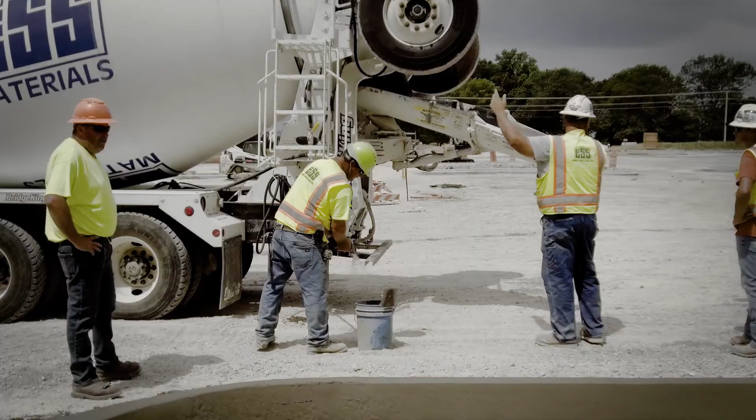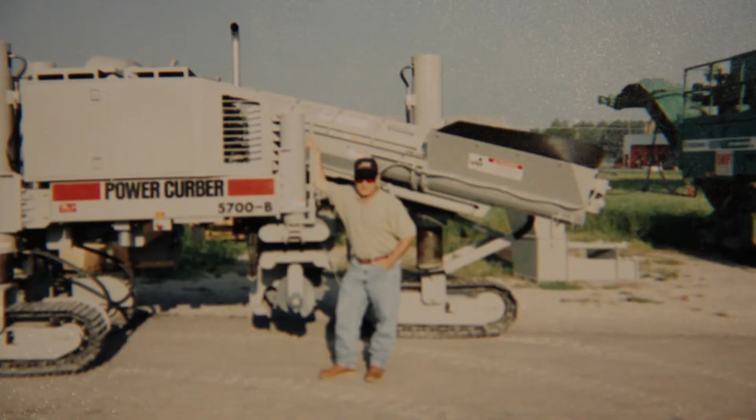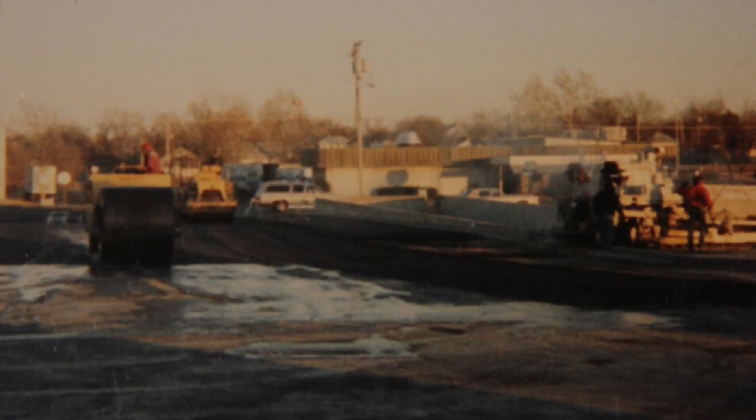We were founded in 1972. Billy Sapp founded the company, named it after his father, Emery. He grew the business, operated it from the 70s into the 80s and into the 90s with an important merger with 4M Bridge when Glenn Robertson partnered with Billy Sapp and then grew the company from there.

Well, I tell you, I'm one of the original guys. There's several more that have been here a little bit longer than me. We did have an original culture here that we all grew up around, and it was a lot of personal sacrifice in those days to build this company.

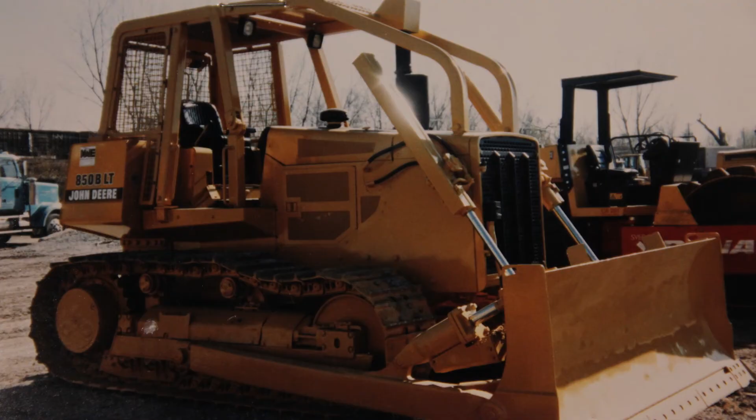The merger with Billy Sapp and Glenn Robertson with 4M Bridge and Emery Sapp & Sons, that's really where the company took off. It went from just doing grading and paving to being a full turnkey service when we added the bridge side of the company. So now we can do just about everything.

So in 1999, he sold the company to the employees. We became the Employee Stock Ownership Plan, or ESOP, and he made an important decision then that those who worked hard to provide for him, he decided to sell it to them.

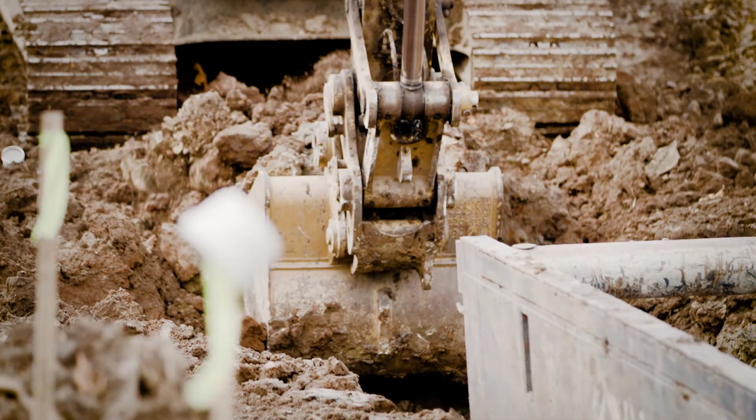Billy saw the value of comprehensive services and compression of schedule to the benefit of these developers, and that's how he founded this company, and that DNA is still a part of our operations team today.

They're still like that today, a lot of them are, and that's why we are like we are, because of those guys. And that mindset that we got from Billy Sapp, which was pretty much get in here and go after it and we'll win. And it's happened, there's no doubt about it.

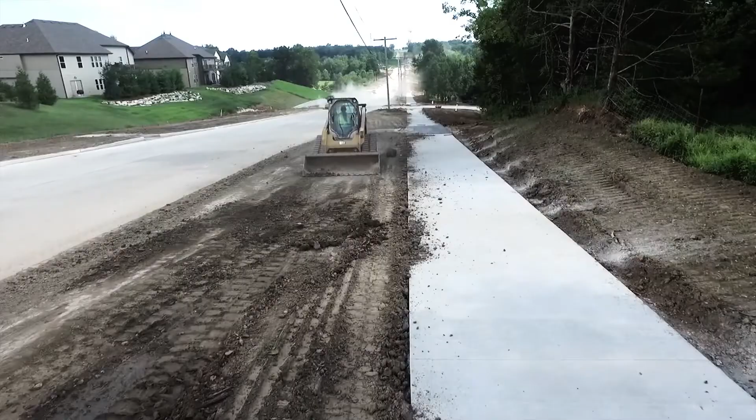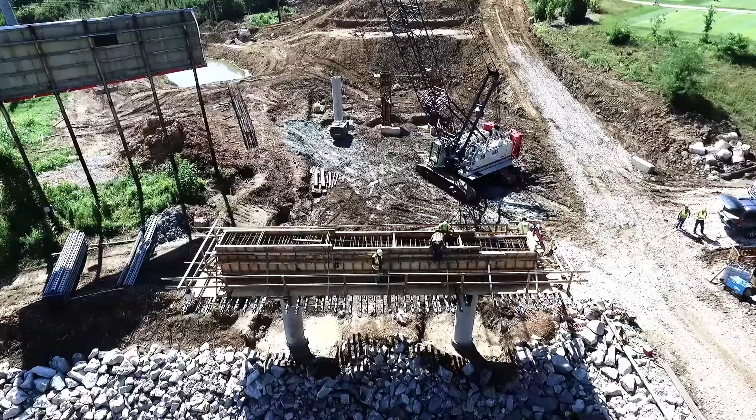When Emery Sapp says that we're turnkey on a project, our goal is to self-perform as much of the work as possible. All of the milling operations, all of the asphalt operations, base rock, grading, utilities, concrete paving, asphalt paving, bridge. We look to own the entire project and not simply managing the construction that others would perform.

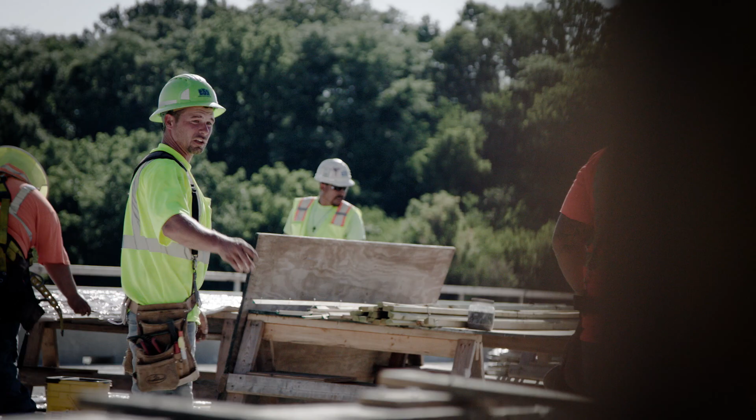What differentiates ESS from other players in the industry is we have a lot of availability to approach projects different ways, whether it's fast track or design build. We have DOT experience, private development.

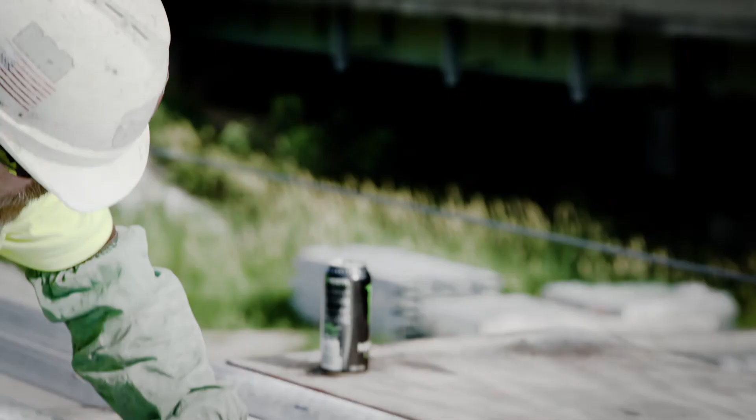One of the biggest benefits to ESS is the diversity in the type of work and the locations that we work in. We have $10,000, $20,000 projects to $100 million projects. We can be a total turnkey civil contractor, overlap trades, overlap scopes within that civil world with the ability to self-perform roughly 85% of our work.

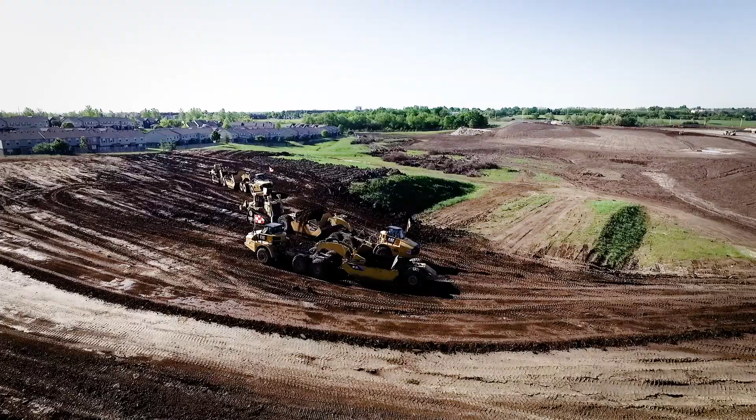We have a great ability to control our schedule and our destiny as far as the resources we can allocate to that project. In terms of the earthwork volumes, we've moved over 1 million yards of material in 59 days for a replacement hospital.

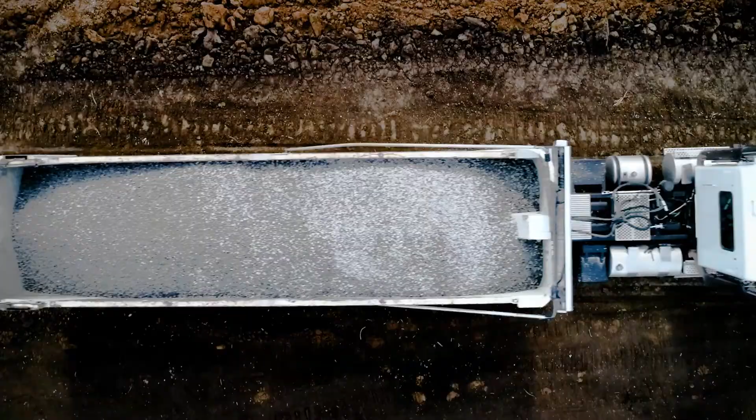800,000 yards of material at a big distribution center in basically 8 weeks. We've had days where we've approached 30,000 cubic yards of material moved in one shift. So we've got a lot of horsepower and we can move a lot of material. We've set some pretty staggering numbers.

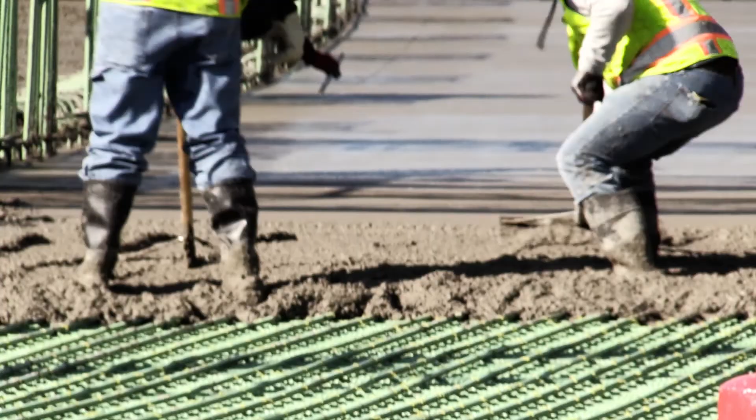We're being productive, we're getting work done, everybody goes home safe. That's the challenge every day that brings me to work the next.

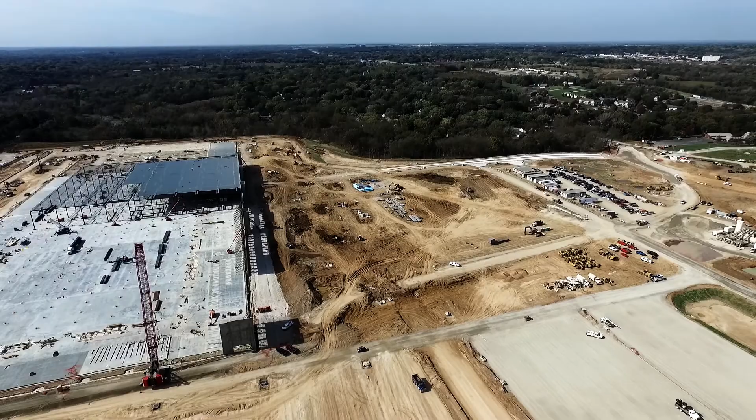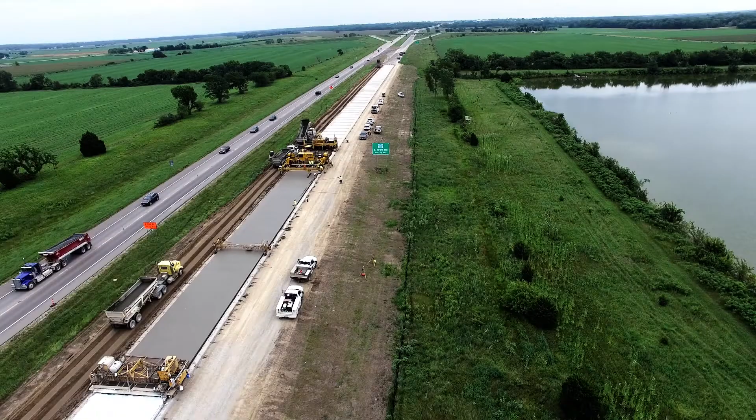Before I came to ESS, I knew they were a large construction company in Missouri, but over the past 6 years, I've seen them grow to one of the top contractors, not only in Missouri, but also the Midwest, taking on aggressive projects, the K-10 Lawrence Trafficway, the bridge slide, building an airport runway in 9 days, those unique projects that really set ESS apart.

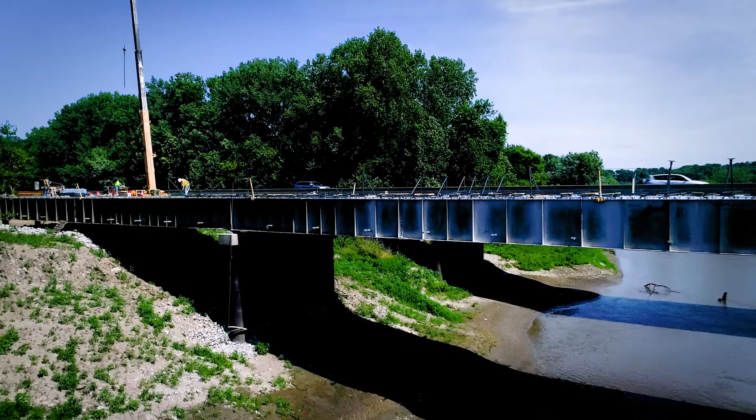Emery Sapp is a very diverse company, and some of the lines of industry that we work in, the client base is everything from private developers, somebody that buys a piece of ground and wants to build a subdivision, all the way up to Fortune 500 companies.

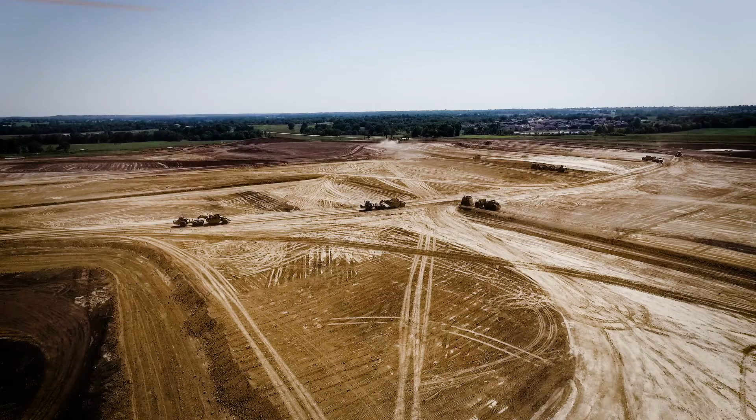We work for the Corps of Engineers, we work for Federal Highway Administration, state DOT agencies, airports, FAA, Department of Homeland Security. We work most of the time as a general contractor or prime contractor, but we also work oftentimes as a subcontractor to larger general contractors.

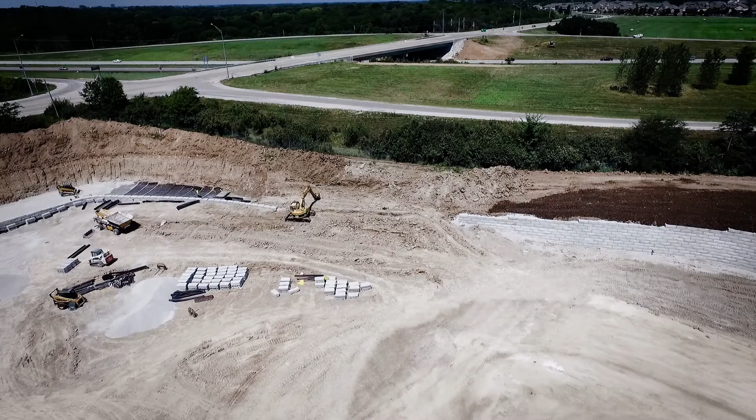I think Emery Sapp is unique in that we serve a wide variety of clients. Not just your public entities, your city governments, your state governments, but we serve private developers, big box stores looking to expand, warehouses, airports. Our competitive advantage is really simple.

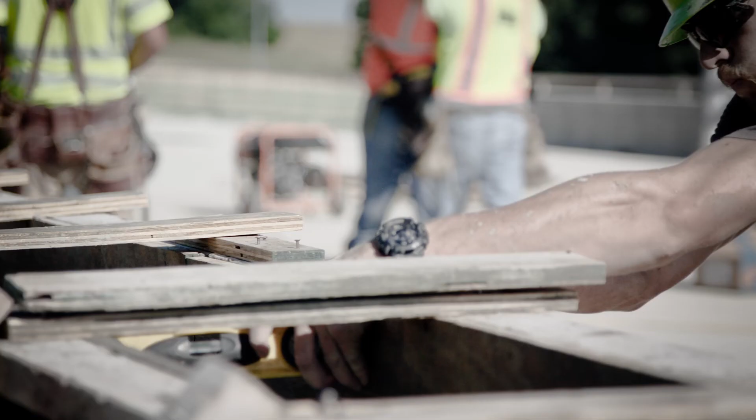It's not a new philosophy, it's teamwork. It's simply teamwork and dedication to satisfaction of our clients. That sounds really simple, but as I've discussed openly with others, we don't have a fear of can someone outperform us on this project? We know that the teamwork through every branch, through every crew, we can call on anyone

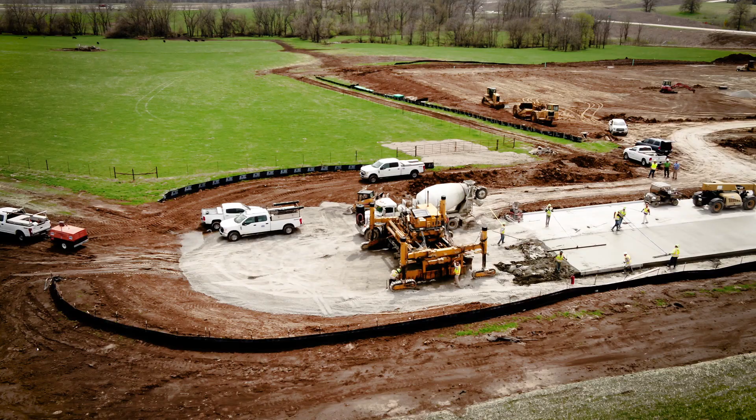and outperform our competition. I believe the reason why clients come back to us time and time again is we demonstrate that we have the ability to perform. And I think more importantly than that, they learn very quickly through an experience with Emery Sapp that we do what we say we're going to do.

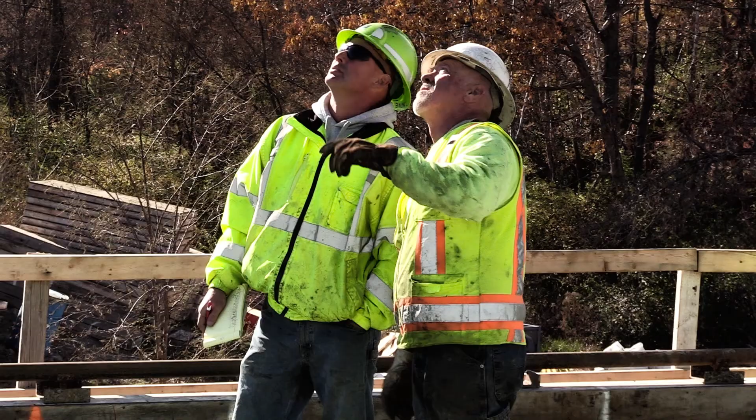Relationships are definitely a big key to everything we do. From a DOT project in a new environment, spurring development, building relationships with everybody in the neighborhood, it just keeps things going. Our customers know a lot of our employees' names, both in work and outside of work. They feel that we've invested in them and they're investing back in us. That's why they keep coming back.

Technology not only helps us here at Emery Sapp manage, but it also helps our clients. We can give them constant feedback for how things are going on their project at any moment in time. If we can predict a problem that's coming up, we'll tell them, let them know, let them digest it, and we'll also present a solution with that problem.

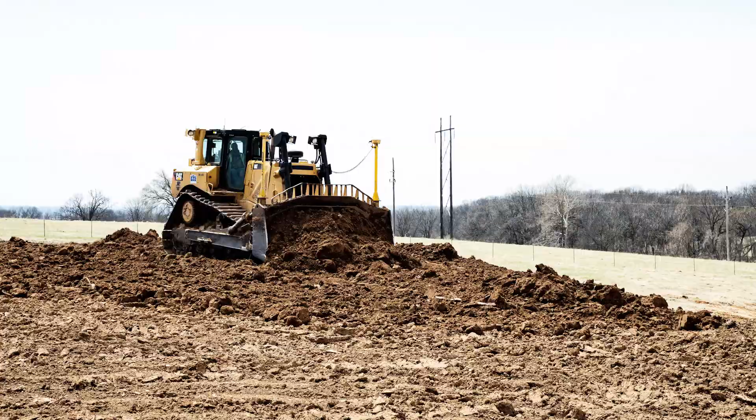Communication's everything when you're managing resources throughout a region. We want to know on any minute how we're doing on any project. We utilize a lot of project management software, estimating software, drone technology, all to get that feedback on our phones, on our iPads, at a moment's notice.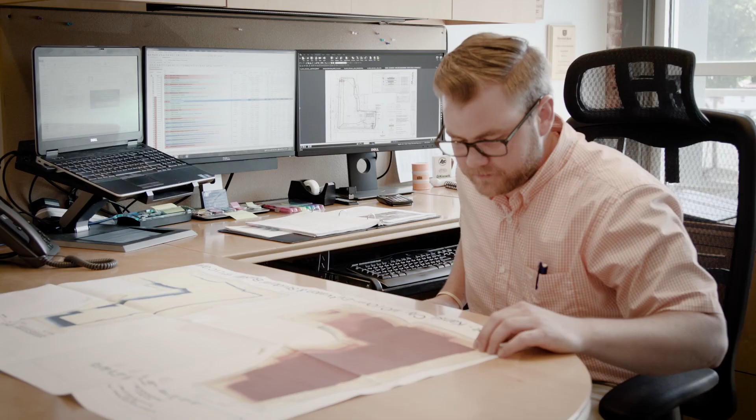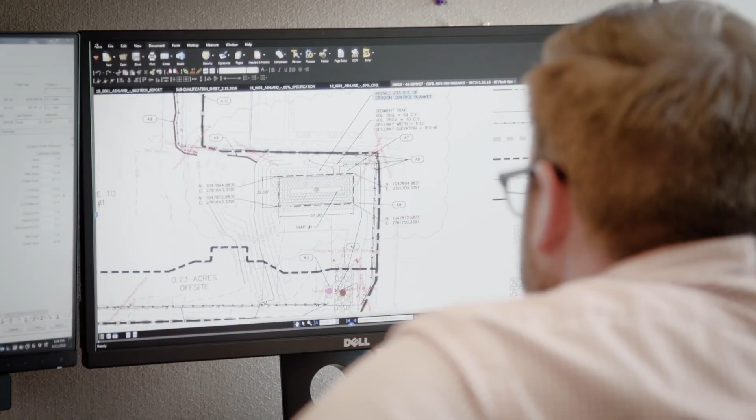That way we can make changes at any given time during the course of work. We use AGTEK earthwork software that calculates volumes of dirt, what types of subsurface materials, if there's limestone on the site, balance points, means and methods, how we construct the project. We also use PlanSwift and a two-dimensional takeoff, along with Bluebeam. Both are great instruments of digital takeoff software. These softwares ensure that we don't miss something. The owners get a sense of assurity that what we're taking off is the correct quantities.

Surveying really begins in an office. So we take the engineer's plans and we use the combination of both of them with the help of Trimble Business Center and AutoCAD to create a 3D model. In the survey department, we take those plans and digital models, we mesh them together, we make 3D models. From there, you take that, you put it in a dozer, you put it in a rover where somebody can be on foot.

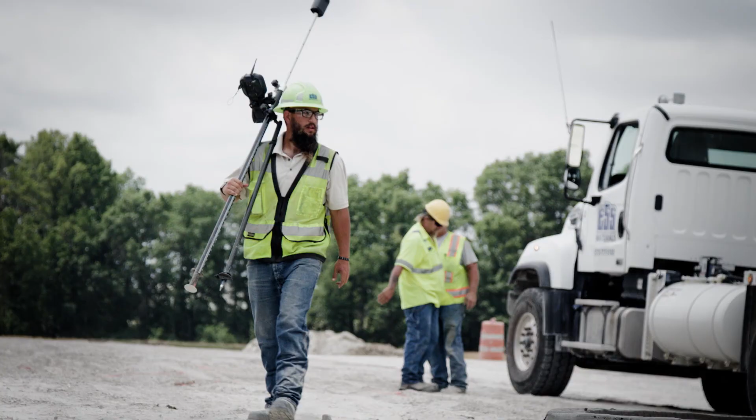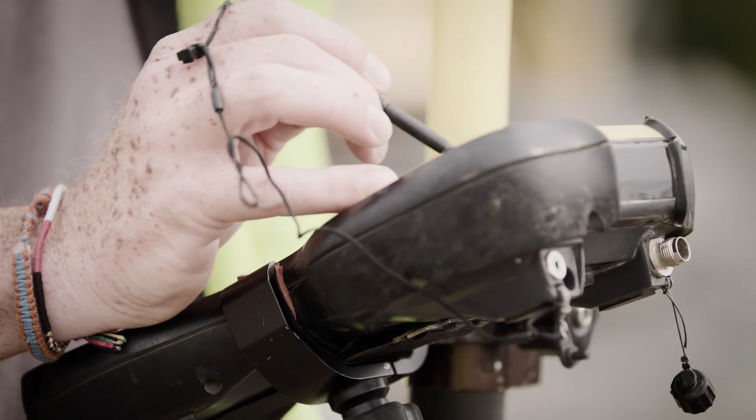We shoot those in off control points that we set so that they're localized to the job. And then we shoot the machine, create a geometric profile off that machine. The total stations lock onto the prisms on the machine, and then tell it where it is in relation to the 3D model that we created. All of it just talks to each other.

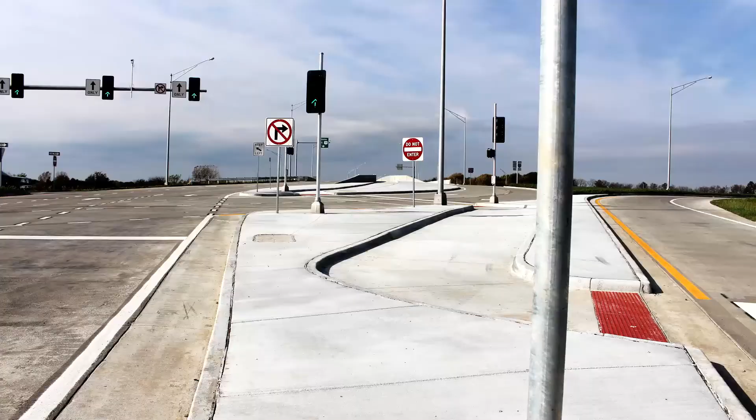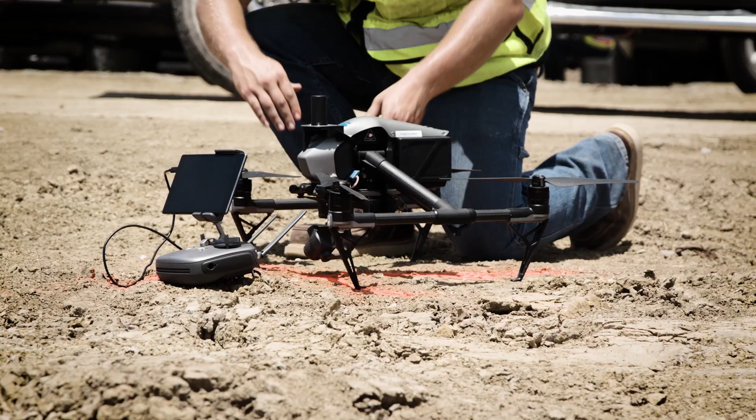We are ensuring that what your designer has put on paper, you're gonna get out in the field. We've definitely pride ourselves in investing in innovation, anywhere from our survey equipment with the drones to our estimating software to our project management software to our scheduling software. We'll do our due diligence, vet that process thoroughly, and then make a decision. We know that as long as we've done the work up front and the data prep, that we can go wherever they say they want to pave and be ready to pave.

We're on the cutting edge of technology. We've always pushed the envelope. We're always one of the first in the region to adopt new technology. It allows us to perform at a higher level at a faster pace. It's just a win-win all the way around.

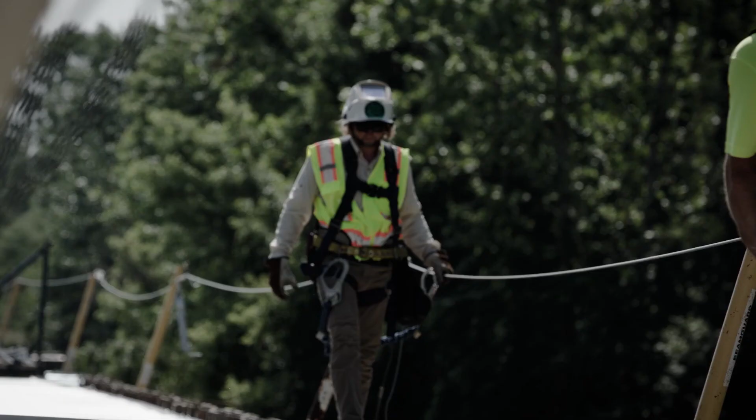Safety culture at Emery Sapp & Sons has always been at the forefront of the entire culture of the company. Safety's everything. Safety's number one. It's 100% important. We won't put you in a situation where you're going to get in any trouble safety-wise. The most important part is that every employee goes home safely at the end of every day.

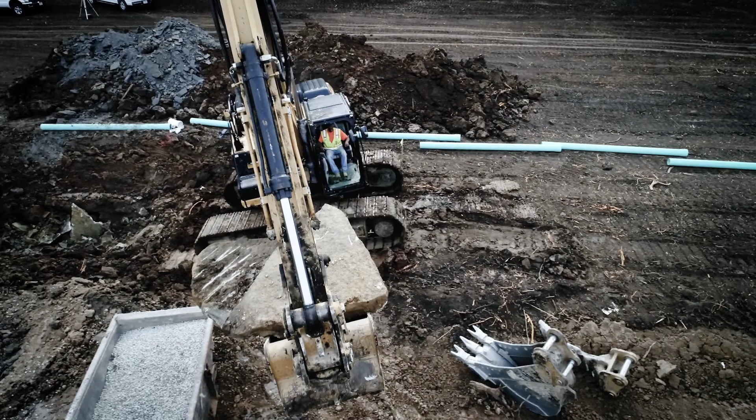Our investment in safety is number one. It's the first thing we ever talk about. Safety, quality, production, in that order. Safety's paramount. They provide every piece of equipment you could possibly imagine for safety. Safest place I've ever been around.

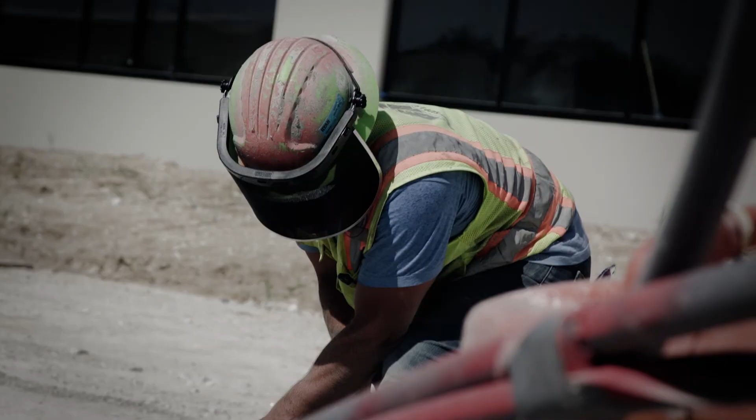Everyone is a safety officer. Everyone has a say in stopping the work if an unsafe act is seen and reassessing that. No one's going to be put in a situation where they have to do an unsafe act, and everyone has buy-in and the responsibility as an owner to ensure that safety culture. We're doing everything we can to keep our guys safe. That's our number one goal.

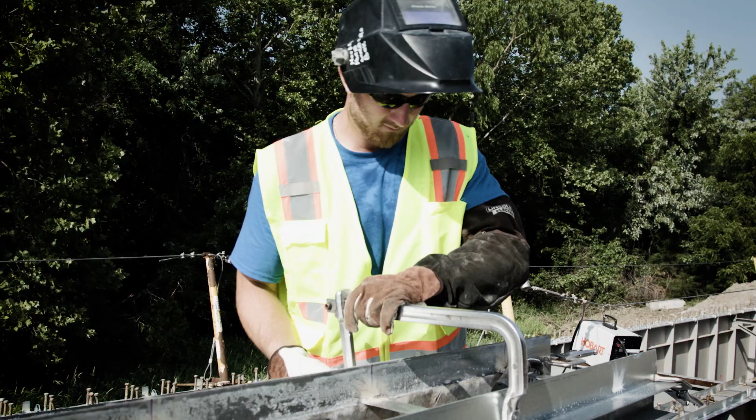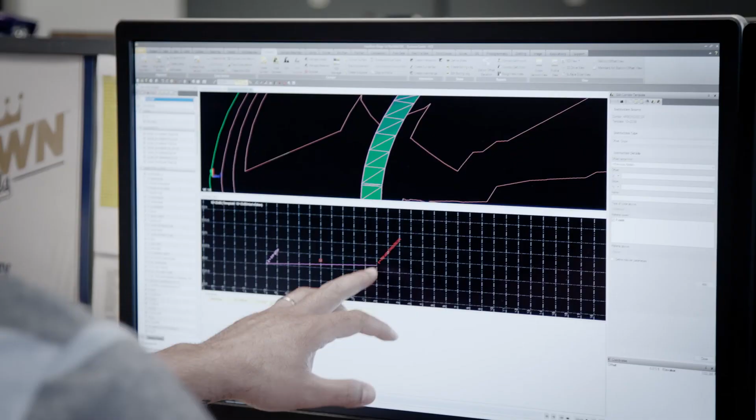Emery Sapp & Sons' quality philosophy is do things the right way the first time. And that goes everything from the way we estimate projects, to the way we manage projects, to the way we build projects. I feel like the bar's set really high. We always want to leave the best finished product that we could on site. Make sure everything's quality so we never have to go back and touch it again.

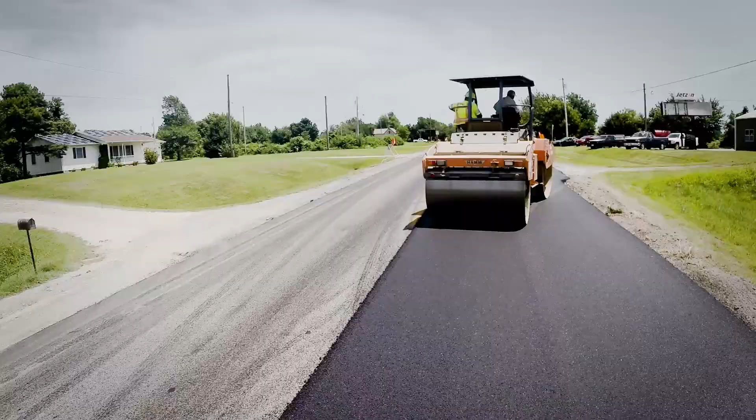Using things like the tarantula curve, which is a new optimization technique, we test every ton that goes out the door. We want our mix to run right down the middle where it's supposed to be. We've won countless regional awards, and you don't win those awards if you are not a quality contractor.

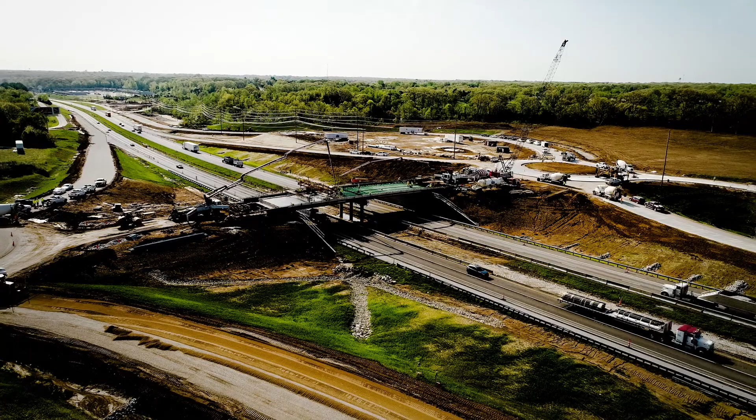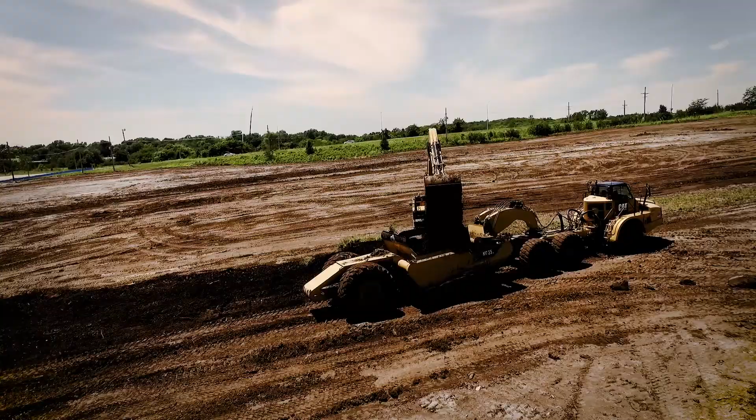From the very beginning, Emery Sapp & Sons has prided itself on being very cutting edge with equipment. We had the first hydraulic excavator in the area, all the way up to the first stringless paving, the first stakeless grading. We've got a very large fleet of equipment, over 1,500 pieces total.

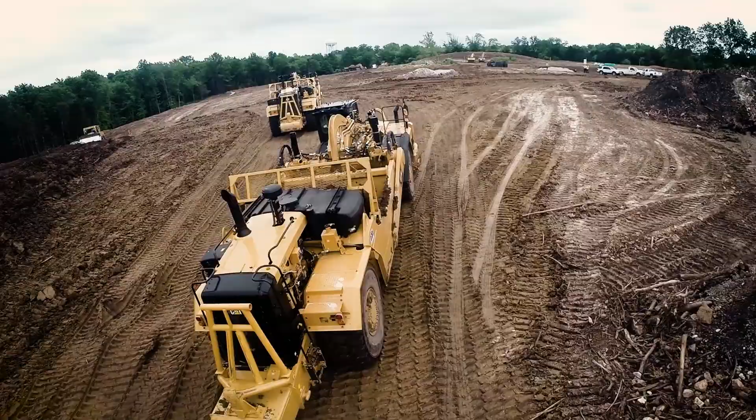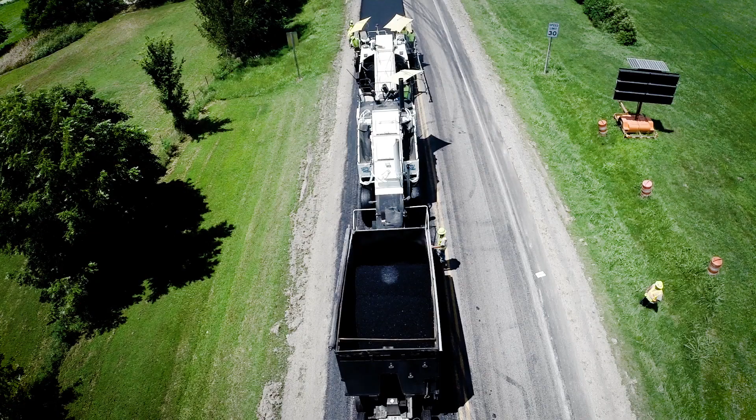Owning our fleet allows us to be more productive. It allows us to boost our production goals. If we can keep our equipment costs down by keeping utilization up, it allows us to pass that cost savings on to the customer. We have 220-ton silos, CMI drum mix, hot mix plant. We also have a full QC setup with 3 guys in that department.

We're really proud of our equipment, but the most important assets that we have in our division are our people and their vested interest in the company. The identity of the company isn't the equipment, isn't the logo, it's the people that make it work, and without them, there would not be an Emery Sapp.

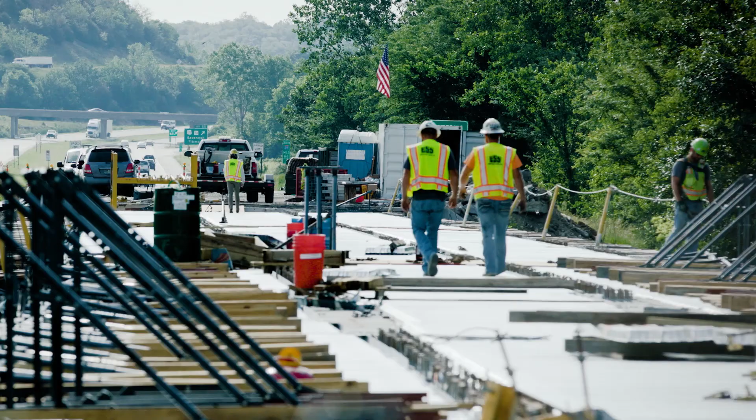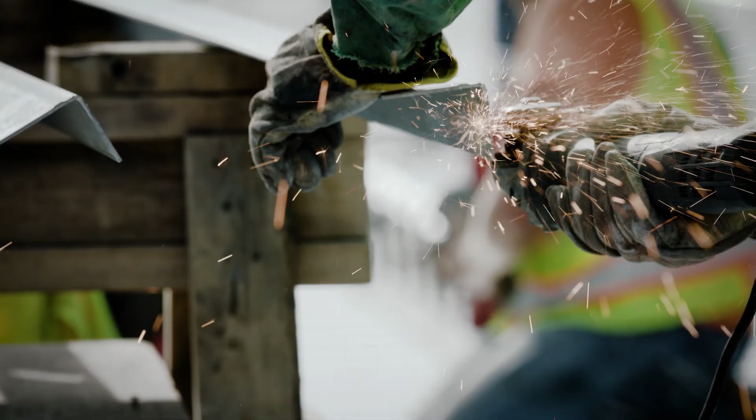The ESOP mentality, which sets ESS apart, is key to every worker because they truly are an owner. The profits of the company aren't going to stockholders far away. They aren't going to the owner of the company. Everyone is the owner of the company.

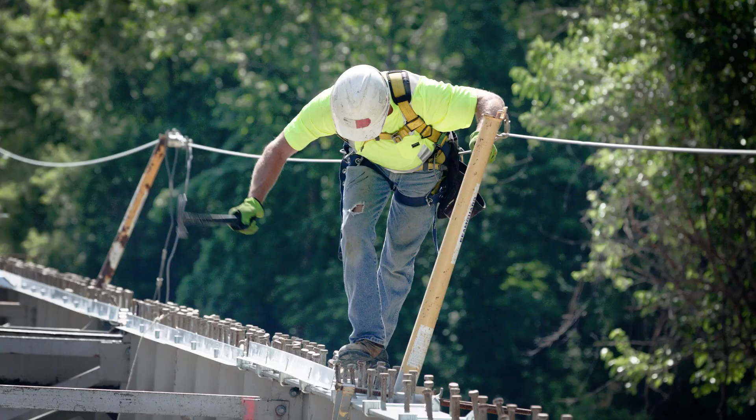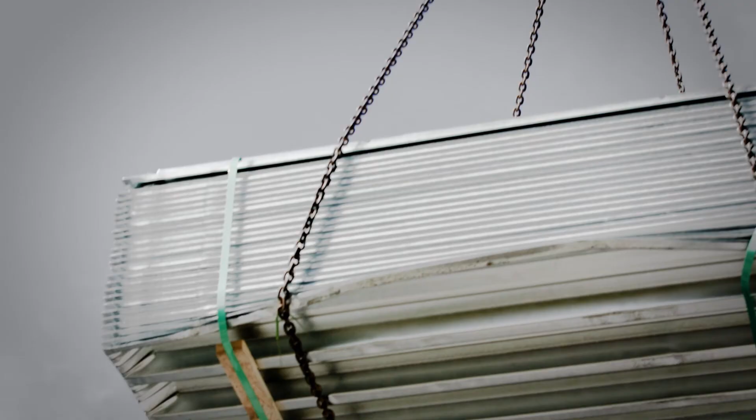Just being a part of ESOP is a really cool experience, just for the simple fact that you're not only just an employee owner, but it's a little bit of accountability that you have with your fellow co-workers, because you're all aiming for one common goal, and that's to make this company successful.

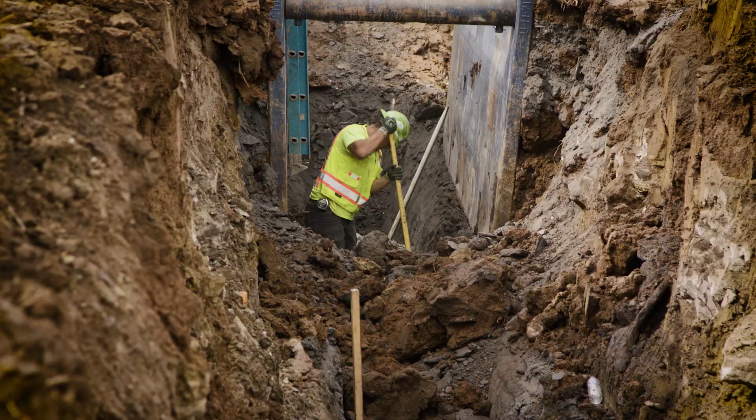They build you up like they build up everybody in the company, and that's what's valuable. Makes you work harder, I think. It's just like a big family out here. They make you feel like you're not a number here, you're part of an ESS family.

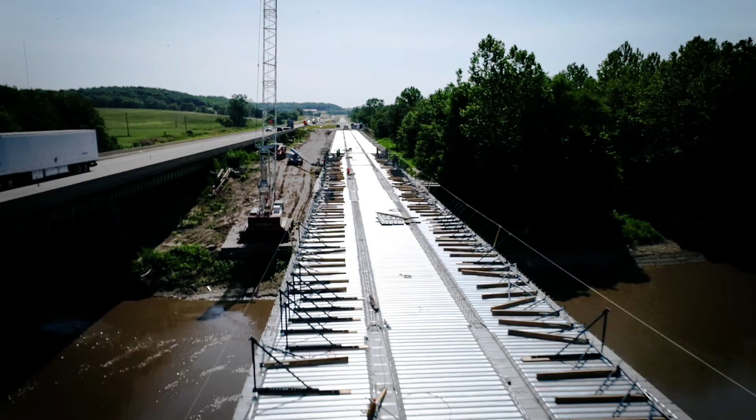One of the number one reasons that we stay profitable every year is our employees. We've invested in them, we invest in technology, we invest in all the right things. We truly keep our fixed cost as low as absolutely possible, and the only reason we can do that is our employees. One thing I love about this company is watching people grow, and as people grow, this company grows. And as this company grows, the wealth of it grows.

The loyalty, the dedication, the entrepreneurial spirit, I think that every one of our employees has, because they know at the end of the day, not only does it benefit Emery Sapp as a company, but it benefits them as an individual. It's unlike anything I've ever been involved in.

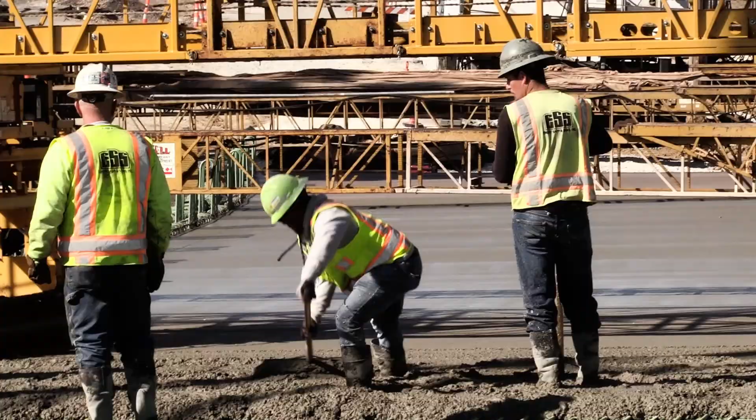I've been here for 4 years now, and in that 4 years, I've seen the ESOP essentially double. That's a big number at the end of the day.

My plan is to be here for a long time. That's going to be a heck of a retirement 20 or 30 years from now. You work here for 30 or 40 years, they're going to hand you a couple million dollars when you're ready to leave. Nobody else is going to do that.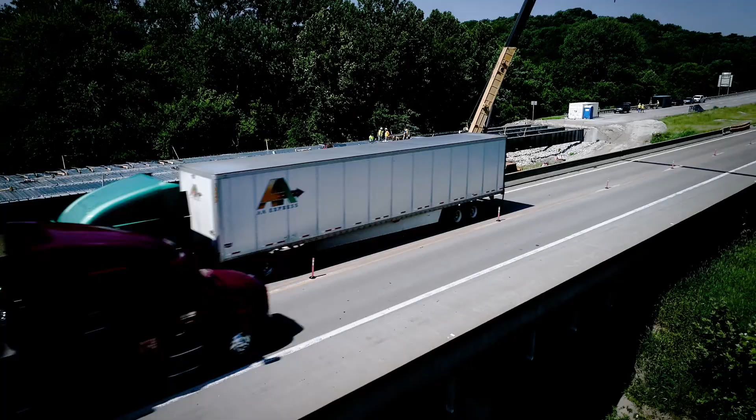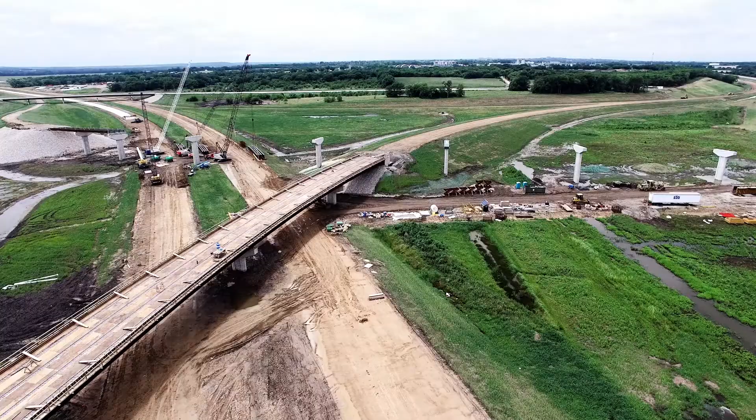Community is very important. This company has grown from Emery Sapp to over 700 individuals, and one of the things we need to do is be able to give back to the community that we've been very blessed to work in.

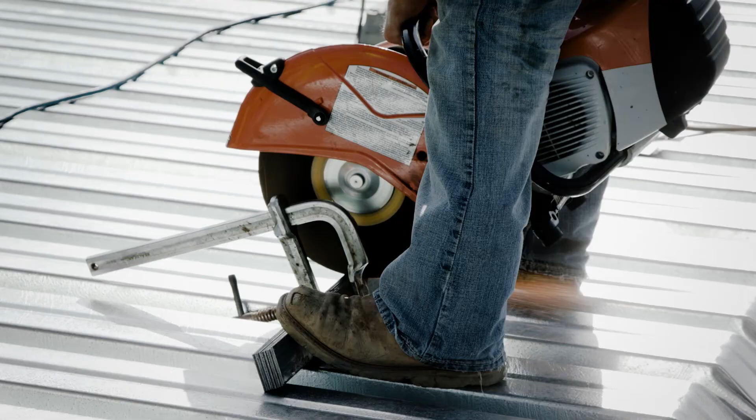Before we put a shovel in the ground, we want to make sure that neighborhood group or that community group or that public entity is comfortable with who we are as a contractor and making sure that we're communicating constantly what's going on in that project.

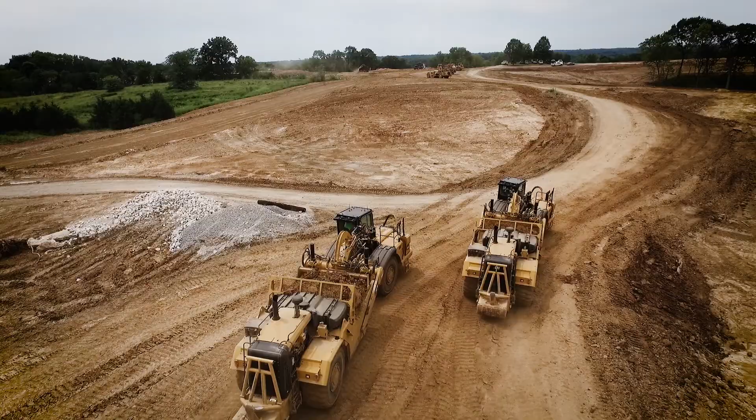All the projects that we're part of, we are part of major change. Our firm's definitely looking for ways that we can mentor and create strategic partnerships and help small or minority woman-owned businesses grow. At the end of the day, we're growing the market and we're helping make a greater impact.

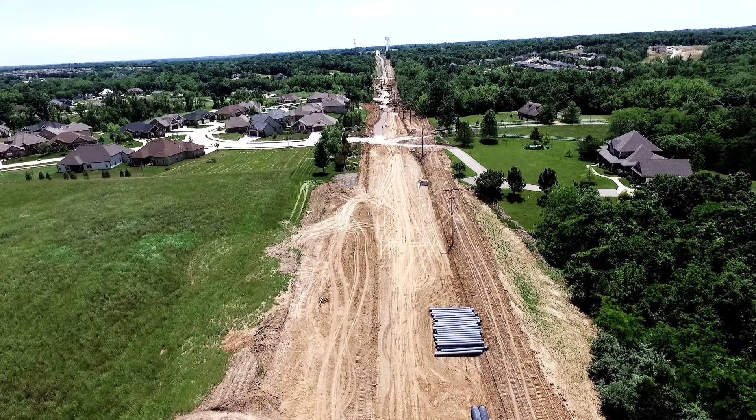We want to make sure that we're engaging those communities, from the local schools to the local municipalities, and being able to be a part of that conversation to make those folks feel comfortable with what we're doing.

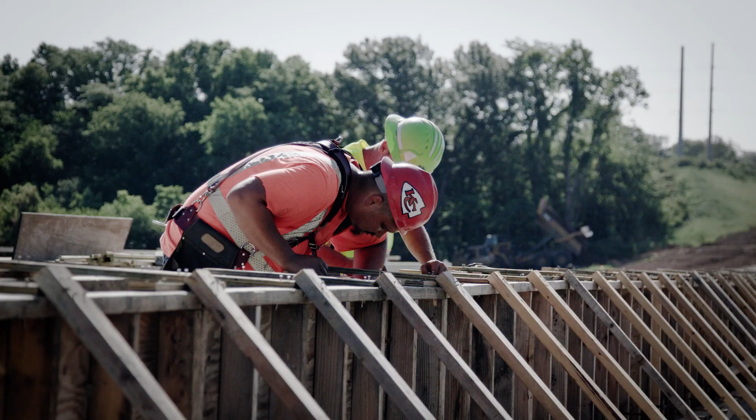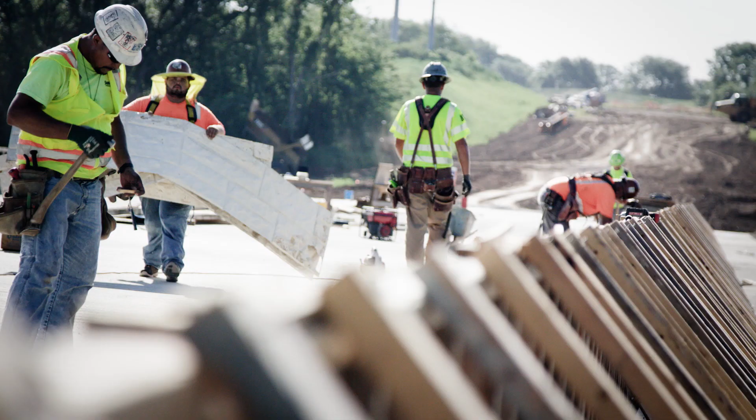We do participate in several contractors associations. Along with all of those affiliations are some sort of giving back to the community. There'll be a work day for United Way or for Habitat for Humanity, and we all step in and go out and help on those days of work and try to give back the most we can in our communities.

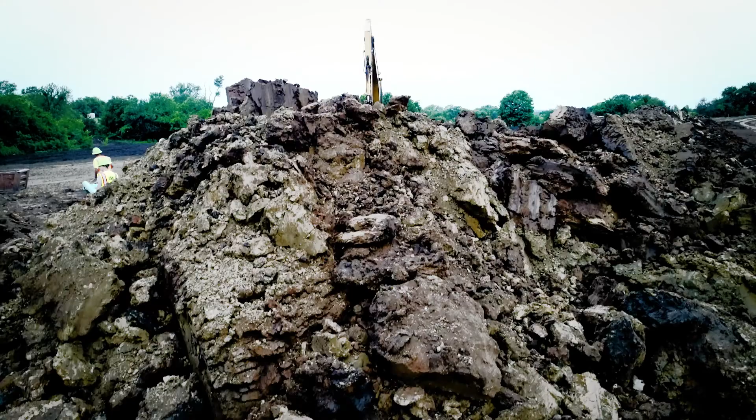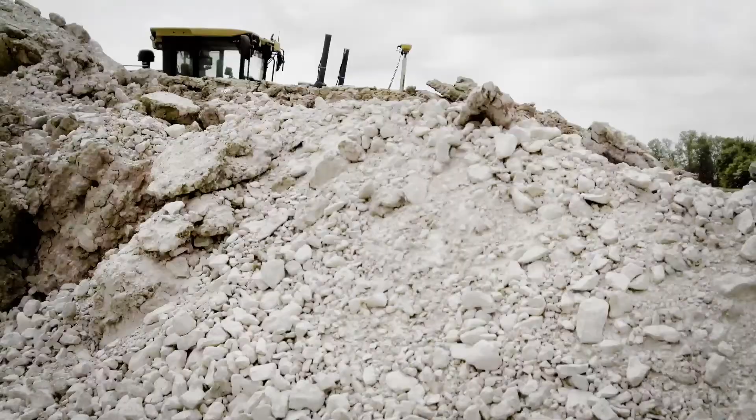What's next for ESS is growth. What's on the horizon past our existing branches is going to be the acquisition of talent, companies, and growth. We'll look for companies who culturally are aligned with us, employees who do work like us. Our company's always looking for the new leaders. At the end of the day, Emery Sapp wants to give back and provide career paths to the next generation.

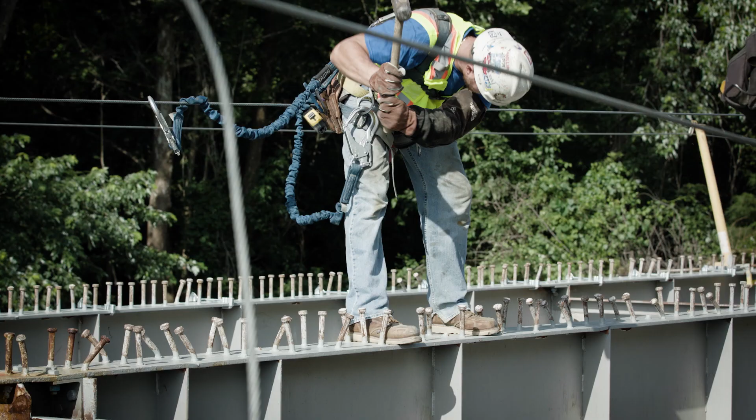I see myself staying here career-wise just because it feels like a good fit for me. I can see myself adding value to the organization, and I feel like that's reciprocated from them. It's a real progressive and transformative vibe that I'm definitely glad that Emery Sapp's a part of.

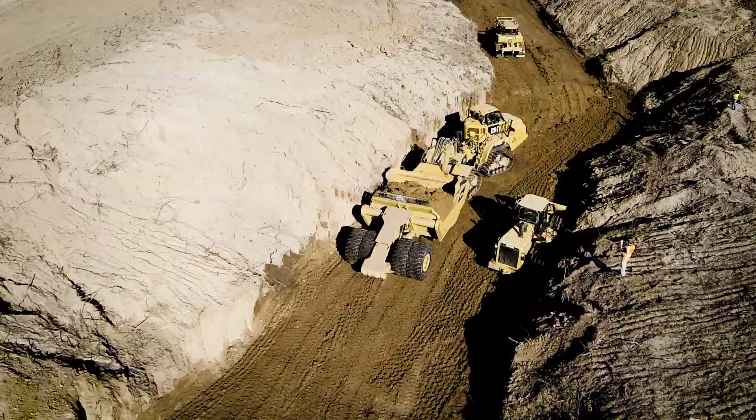When we talk about just long-term legacy, we definitely have an opportunity here to be a part of that conversation. We continually keep pushing the bar higher, and we've been able to deliver every time, and I think we will continue to do that. That's what makes us strive to be the best.

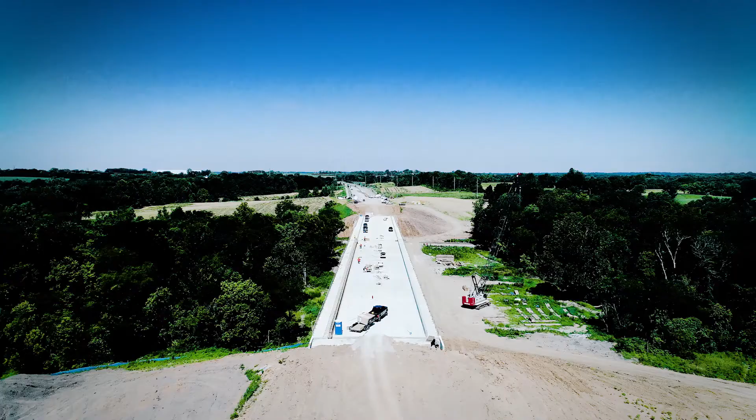Whatever we do, the ESS way. Whatever we do, best of class.